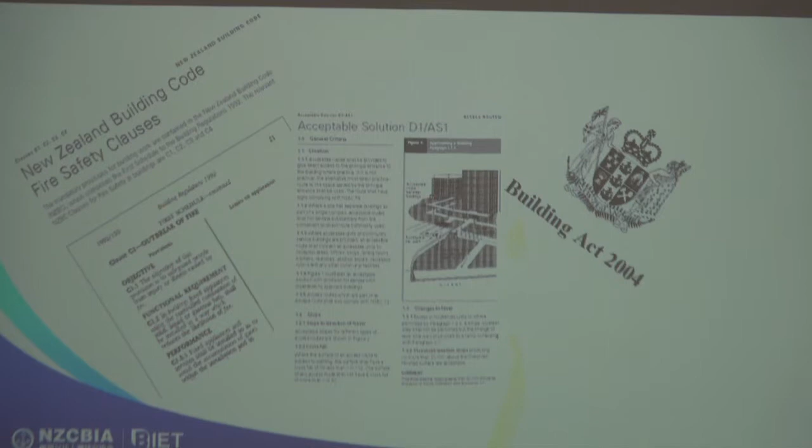So this is just an example of the Building Code, the fire safety clauses ones. There are three main requirements there: an objective, a functional requirement, and a performance criteria. That happens even if you're building a laundry in a residential house. There is an objective, a functional requirement, and a performance criteria.

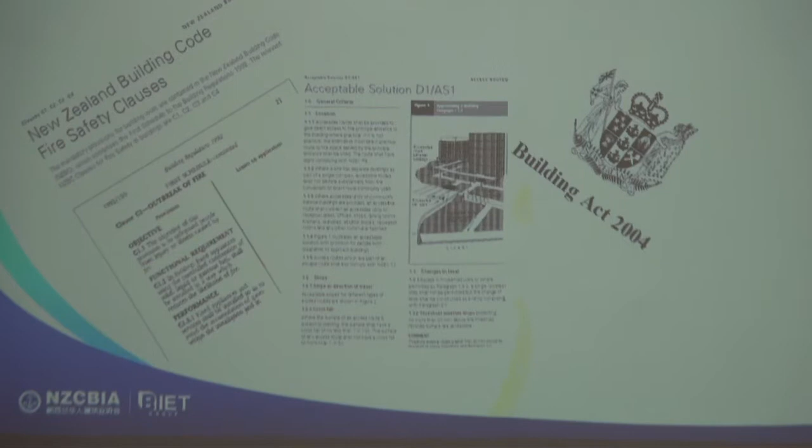The acceptable solutions tell you how to do it. The acceptable solutions are one way of complying. If you comply with the acceptable solutions, you therefore comply with the code, and you'll therefore get a code compliance certificate.

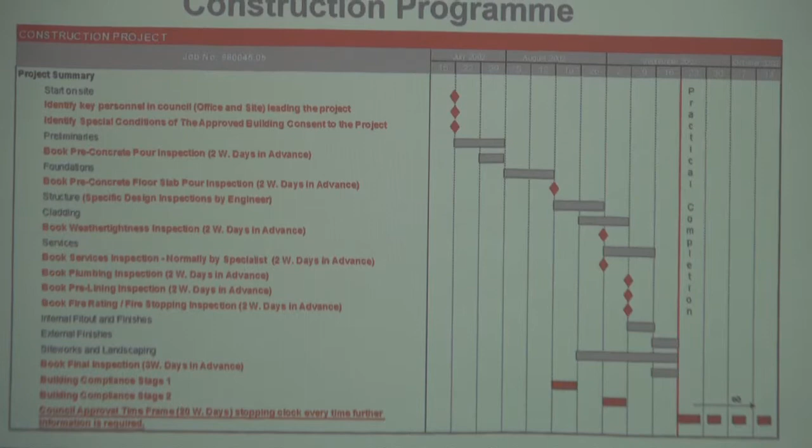So I'm really just talking all about the Building Act. What we do in construction is base everything on a construction program, and I'll do a little construction program a bit later, and some checklists of systems that we use and things that we do on site.

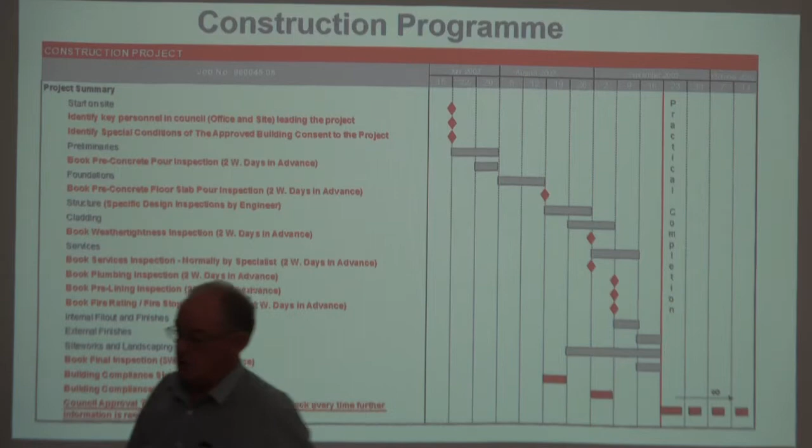I've written this up because the importance to me is the very last line. The very last line down here, and the time frame is when you get paid. So if you work through all of these items and you do every single item on there and you get your building inspector on site, be nice to the building inspector.

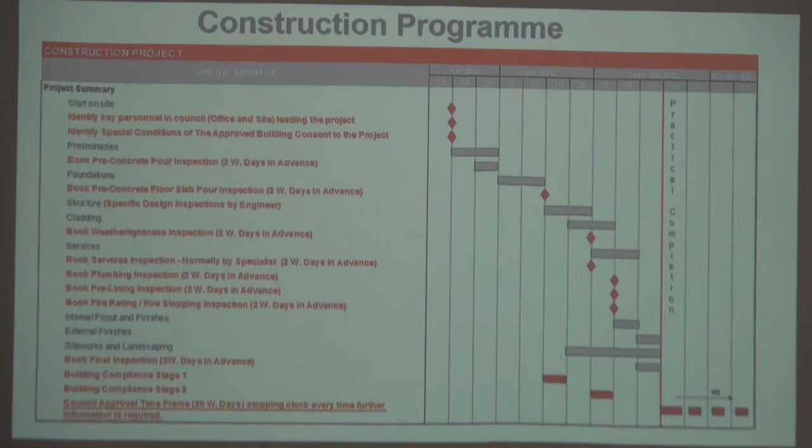I'm one, I used to be a building inspector. I like people being nice to me. Don't think he's the enemy. Don't think that he's someone that you can hoodwink, or a lot of people think don't tell the building inspector. That's actually not a good idea, because the building inspector, they've done a lot of training. They do continuous training all the time with new systems, new law that comes in, new products that come on the market. So therefore they've got good knowledge. Use that knowledge to your advantage.

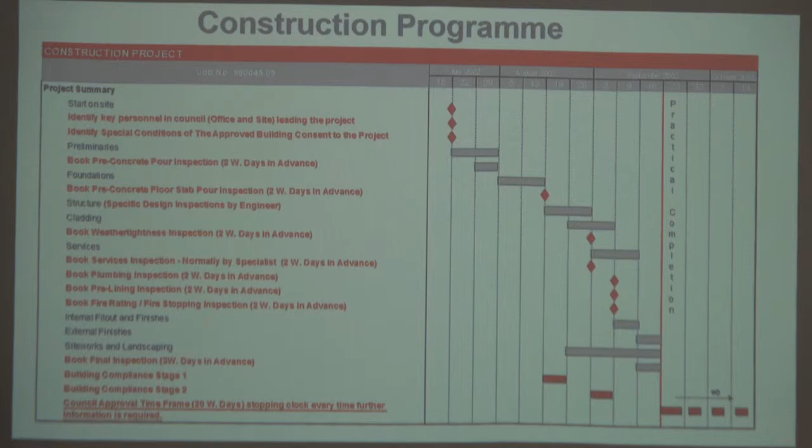Don't ignore it. So I'll be referring back to a construction program. What I want to do quickly though is just go back through some of the Building Act itself and what actually happens and the purposes. Well, go back one.

It talks about people. It talks about safety. It talks about health of the people. It talks about the well-being of the people. It talks about escaping during the event of a fire, and it talks about sustainable development.

Now, I've always called it the People Act because it protects the people. It doesn't protect the building. If the building burns down, get your insurance company to build it up again. We need to protect the people at all times, whether it's a simple house or a big commercial building. It does not matter - we're protecting the people.

The overview has lots of parts to it, and I've just picked out one item - matters relating to building practitioners and licensing, getting LBPs on board, which you use a lot during residential building with multiple story buildings. We don't use LBPs in big commercial buildings.

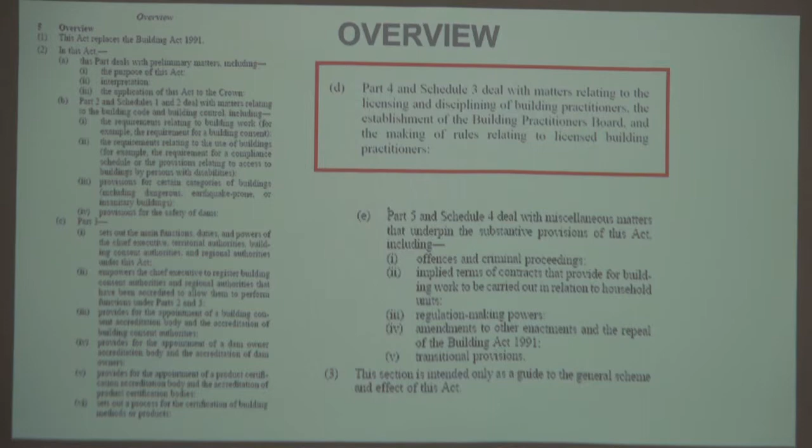But you do use an LBP a lot in specific wind zones where you've got high wind zones, cavity systems, very complicated roofs, and systems which are new to the market. So you use LBPs quite a bit for that.

The interpretation - there are pages of interpretation and codes. I'm going to pick on just three today: code compliance certificate, compliance document, and compliance schedule.

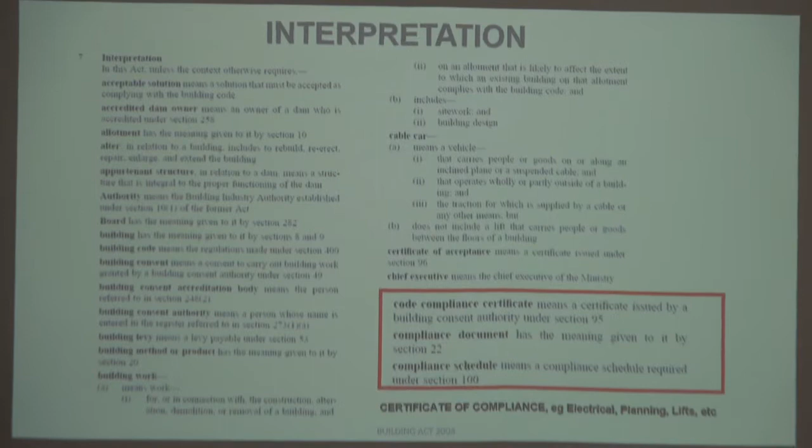Now I've said compliance, compliance, compliance. And the reason I've said that is, although I'm a quality and compliance person, to me compliance comes first. Because if you don't have compliance, you have not got quality. You can't have quality if you haven't got your code compliance certificate. So to me, compliance with the building code is the most important thing, and Jenny hears me talking about this a lot in the office and on site. Compliance with the building code is very, very important.

To achieve compliance, you've got plans and specifications behind them. See how it includes procedures for inspection. The council officer is required to inspect the building work, and you have to give that man or lady a chance to do that inspection.

You might be doing quite a large job, in which case you might have to use the inspector a number of times. We can write out some lists later - we'll pick up a job that you may be working on, something that you're doing, and I'll start writing up a list of things that we need to do to achieve compliance.

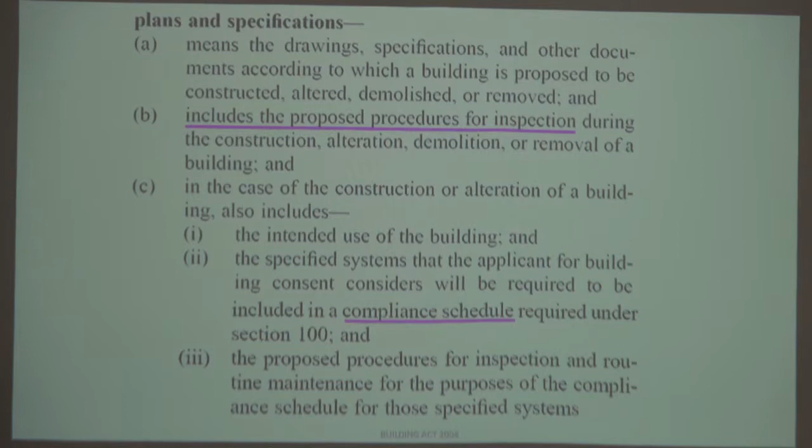Compliance schedules are used on big commercial buildings, and they're only used for systems in buildings that have fire alarms, lifts, mechanical ventilation, all of those kinds of systems - things that need to have a battery changed or need some kind of maintenance throughout the year. Then it goes on a compliance schedule and becomes part of the building warrant of fitness. I won't go into all of building warrant of fitnesses because I think that's commercial industrial work.

Further information is anything the council will want when you're applying for a building consent - it might be you've got a simple residential house and you're putting a beam in there, and that beam has a greater span than the New Zealand standards have. Then the council's going to ask for further information: how big is that beam going to be? What's it allowed to hold? Lightweight roof? Heavyweight roof? So all of this further information you need, and your architect needs to deal with it.

I've got a few there that particularly relate to large commercial buildings: fire engineering, heating and ventilating, lifts. The exterior cladding is quite important to you guys, but particularly if you're doing housing, because you're looking at cavity systems and specific design.

You're looking at a particular manufacturer who wants to put in a particular product on the job. That technical information you need to have in your hand so that you can show the building inspector. It's very important that you include the building inspector with all the relevant information, otherwise he's not going to pass it.

The best thing you can do is get on side with that building inspector, invite him onto the job early, do a walk around with them right from the early stages so that they get a handle on what's going to happen, why, when. You should have a program of time and date, because the owner is not going to pay you until you get your code compliance certificate. That's usually the case.

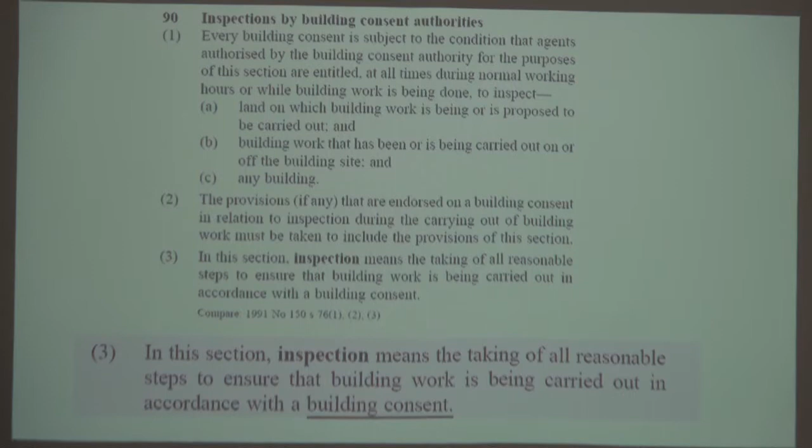And then we had a third one which built the actual big structural frame and the building work itself. And then the fourth one dealt with all of the internal fit out.

So we can do it in stage consents, and that's quite okay, quite acceptable. Not usually done with a residential building. With a residential building, you've usually got just one building consent, which makes it nice and easy.

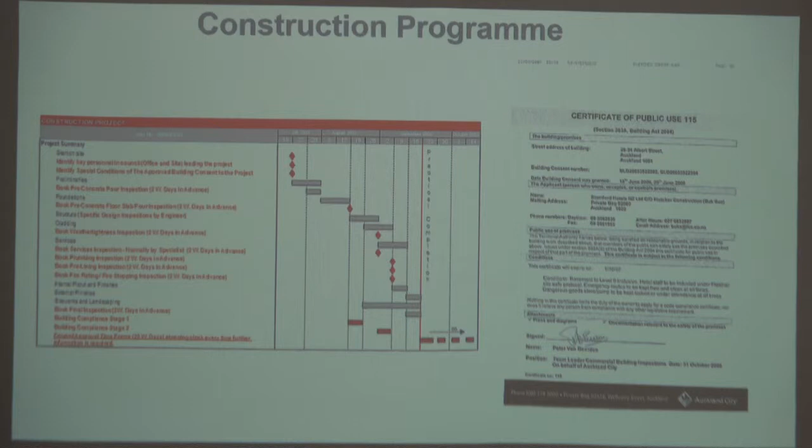Again, we go back to the program of identifying your personnel. That particular certificate is one we use on commercial and industrial buildings where you're allowed to occupy part of the building but not all of it, and continue the work. You can get a public use portion, like the shops on the ground floor, while you're building the rest. But your whole building consent relates to the whole building. You can't shut the building consent down with a code compliance certificate.

So understanding a building consent process, whether you've got a small residential building, and what I might do is just do a little quick thing on the whiteboard while this is up.

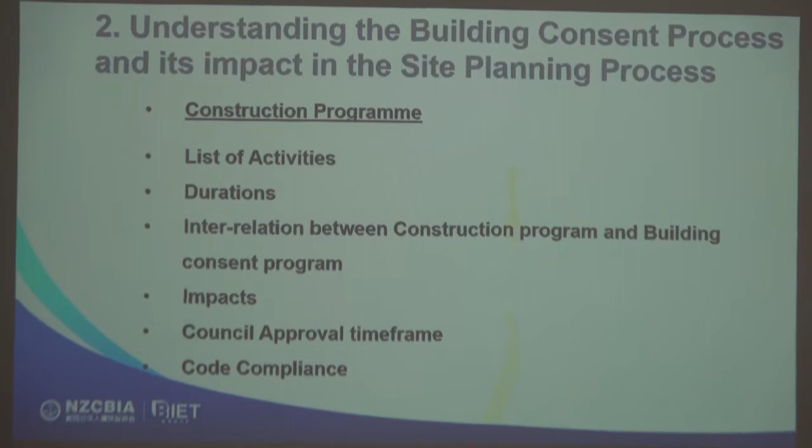What kind of work do you people work on normally? Are you working on small residential work? Is it additions, alterations, or is it a whole building, a whole brand new house?

The whole building. Okay, well let's have a look at the whole building work. I've got a construction program in there, but it deals with quite a large building. But let's just do, so it's a new dwelling.

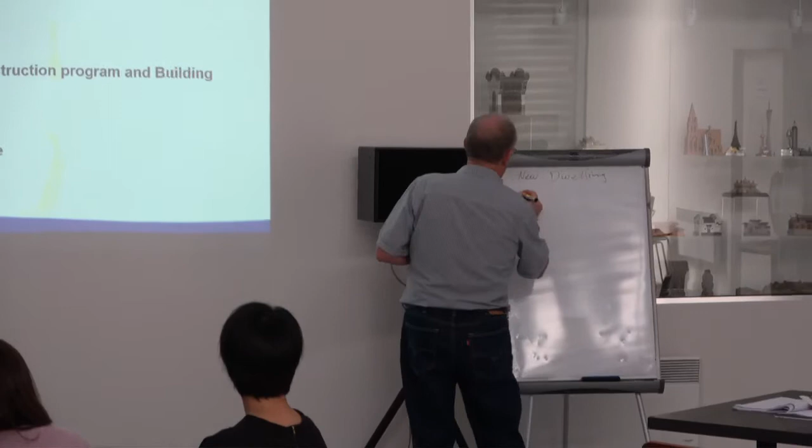So let's have a look at what's the first inspection you think you would go for when you're doing residential? Pre-pour, before you pour any concrete.

So one of the things you have to do is get the inspector involved before you cover things up. Covering it up with concrete, putting the gypboard lining on the walls, that's covering it up. Putting the roof on, that's covering up. Putting the outside cladding on, that's covering up. So there's a lot of inspections we might have to get.

For a very simple job, like an addition of a laundry or something, you might only have 5 inspections. But for an average dwelling, let's put it into a high wind zone. So the first one is foundations.

Different types of foundations, whether it's pile foundations or a concrete slab, you still need the inspector to have a look at the ground, because it depends which area you're working in. Some areas, like where I used to work up north in Albany, had poor ground and you needed to get that inspected first.

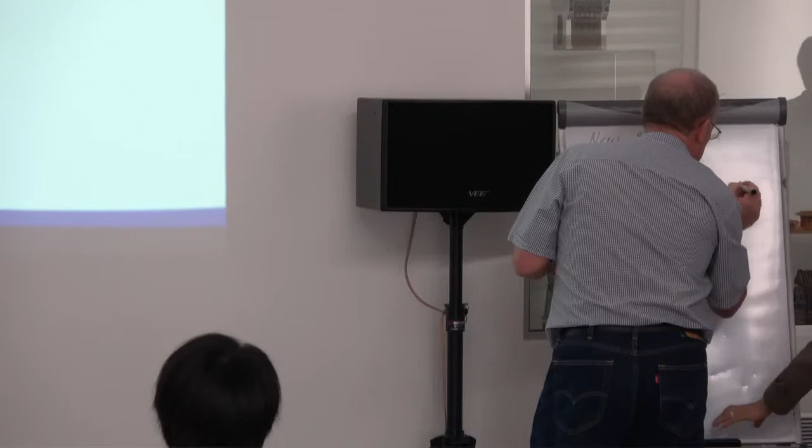If there's 2 different types, there's pile foundations. But in each case, whether pile foundations or a slab foundation, you need to get the inspector involved because they need to look at the ground to make sure. I had various jobs where, as an inspector, I was asked to go look at a job in Northcote.

I went on site to have a look at the job, and they had some foundations poured, some foundations dug, and a lot of work happening with machinery. Thank you, I might use that one.

But whilst I was doing my inspections, I was walking along and happened to notice a hole in the ground with a man's shirt in there. And I thought, well, that's odd, I shouldn't see a man's shirt in the hole in the ground.

So I did all of the inspection, very steep ground. I said, we must have an engineer involved here. And by the way, you've left your shirt in there. So I went down to pick his shirt up. Underneath was the drain. He was trying to hide the drain from me, even though it was on the plans, and tried to hide it by throwing a shirt in there.

That made me look for more and more on the site. If he had been honest and upfront with me and said, hey, look, I've got a drain here, what do you think I should do, I would have been able to say why don't you do this and why don't you do that, and we can fix that problem. But instead he tried to hide it, which only made me go looking for what else he'd hidden. So try and get the building inspector on site.

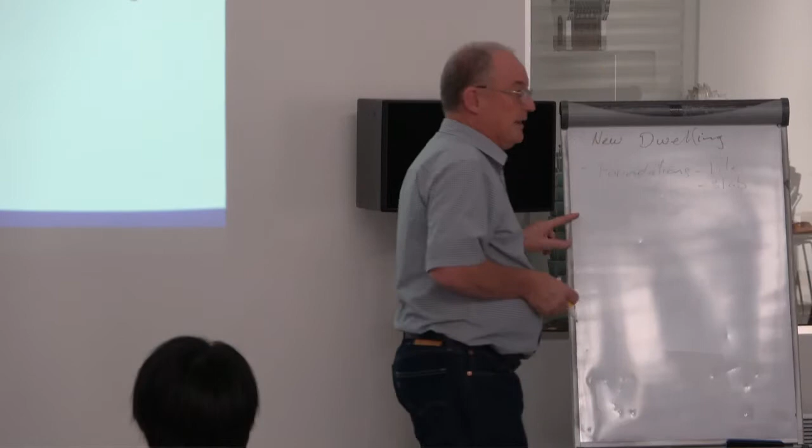Foundations. If you've got a slab system, you need the plumbing inspector.

So you need the plumbing and drainage inspected by the plumbing and drainage inspector before it's covered up, before you put your membrane down. Because you've got plumbing pipes in there that need to be on the correct fall, and they need to be the right type, whether it's copper or plastic, doesn't matter. So that's another one.

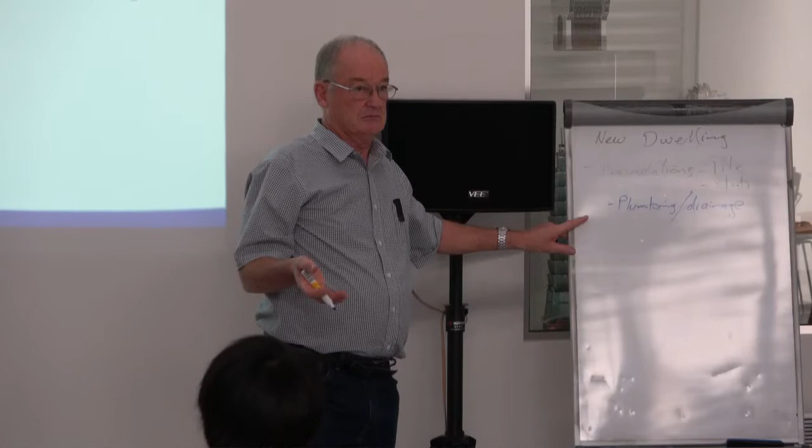Can anyone think of anything else in there? We don't look at services like electrical services. They're nice to have. We don't look at systems like underfloor heating. If it's in there, that's fine and we'll accept that, but we don't test them because they're not a critical part of the building code.

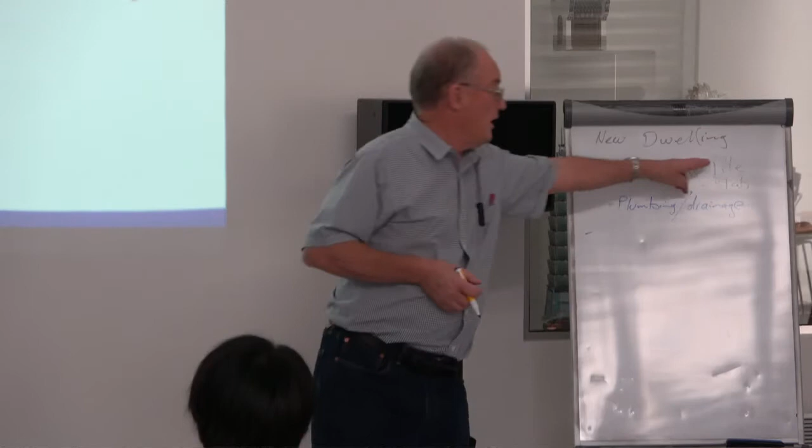Not yet, anyway. So then we've got another system in plumbing drainage, so that's just in the ground. Now we can book our concrete, once we get a pass. Whether it's pile foundations or a slab, doesn't matter, we can now pour the concrete.

Don't have the concrete truck sitting out on the road expecting the inspector to turn up, because he won't. I know, I've done that. There's no point in doing that. So make sure you book - you need 2 days in advance to ring ahead, to get hold of the City Council to get your inspector booked.

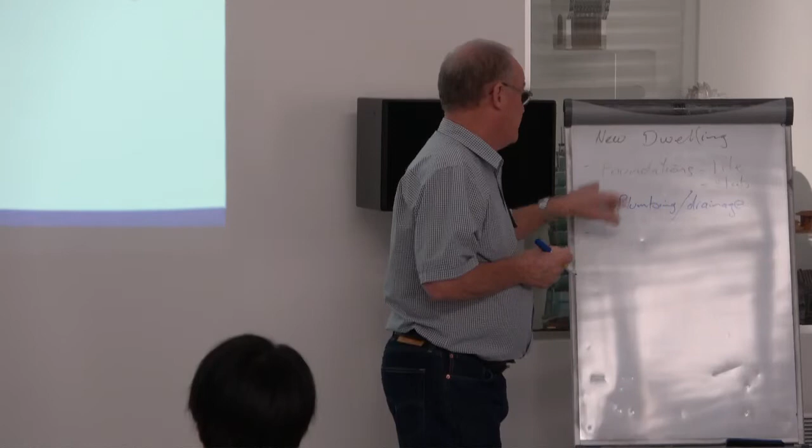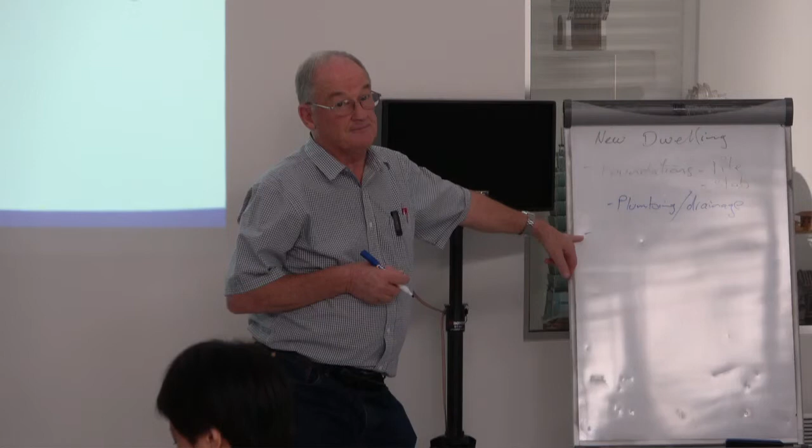Then, so plumbing and foundations, then we've got to look at systems with - the next one after that would be framing inspection. A framing inspection will be pretty well when you've got the roof on, covering the framing, but of course the inspector wants to look at the framing under the floor if it's a typical pile foundation, joists and whatever. They'll want to have a look under there as well, and to make sure you've got all the correct nogs supporting the joints of the flooring right through to the insulation, all of those systems in place.

But that's all can be seen and it's not covered up, right? So that's a framing inspection, and a lot of inspectors won't do the framing inspection until you've got the outside cladding in. The outside cladding is to protect the framing, particularly if it's kiln-dried timber. If it's kiln-dried timber, you don't want that getting wet again. So you've got a framing inspection really when you've got the outside wrap on, the first layer.

Don't put all of the layers on, just the building paper on. Get it covered in, and at least talk to your building inspector to find out what he wants to do next. He'll want to see the flashings for the windows. There's all of this detail that needs to come, so you've got a framing inspection, window detail, moisture content.

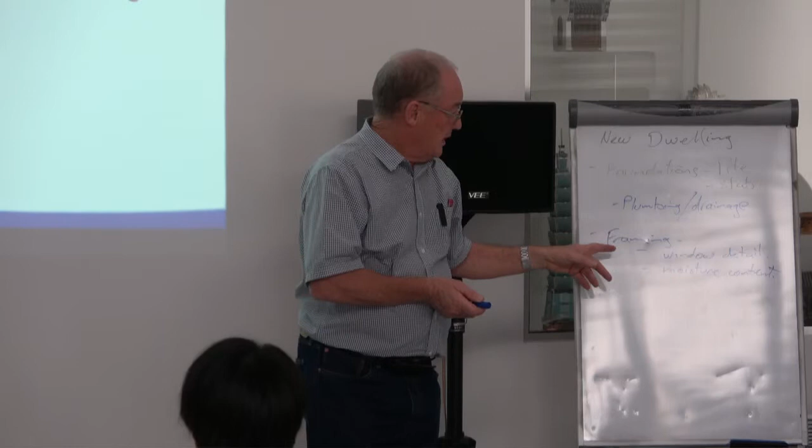Pre-line framing. Then with framing you've got a pre-lined framing and a post-line, so you've got two different inspections. So at this point you'll need your plumber involved.

Plumbing and plumbing services - there's lots of things to look at, making sure your plumber doesn't just drill a big hole through the stud to put his pipe through, and therefore you lose the integrity of the stud. I've seen that so many times as a building inspector. I've seen pipes put through the underfloor joists with a very large hole right in the middle, and the joist will collapse.

Very recently I had friends who've got a house over in Hobsonville, and we've been doing some renovations to it. We took it apart. We always wondered why the floor was a bit bouncy. We took the floor up, and someone had taken a chainsaw and cut big notches out of the joists to get a new pipe through, so the floor joists were only that thick instead of being that thick. So yeah, a bit of a cowboy, wasn't a very good idea.

You've got to be a wee bit careful with that sort of thing. Plumbing services - make sure that each person is involved. I can go in depth on all of this and spend a lot of time on different examples, but I'm just going to do a brief overview. Plumbing services and framing happen before you do your linings. So again, these are critical stages - you've got a building inspector who needs to be out, and a plumbing inspector who needs to be at the beginning, a framing inspection, and then another framing inspection which is the post-lining inspection.

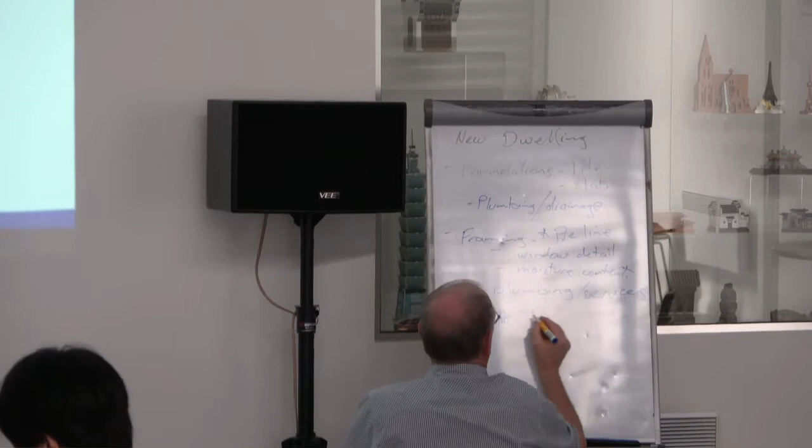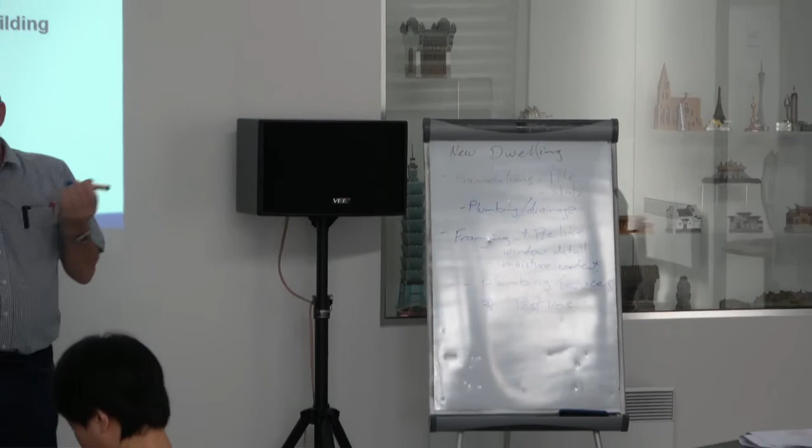So that's framing pre-line, and then post-line inspections. Post-line inspections are there for doing bracing systems. I've got a bracing book here somewhere.

So you'll see quite often typical bracing systems. Winstone's put out a book on GIB bracing, and one of the most important things I come to look at is the structural framing and whether it's compliant with the type of treatment, whether it's got the right moisture content, and whether you've got no major cutouts, holes, or big knots in the timber, particularly in a brace.

In a typical standard house, the bracing - which is the structural framing - is supporting the rest of the house. If you don't get that correct for the framing, and if you don't get the correct fixings holding the brace down, in an earthquake or a high wind zone, that brace is going to fall over. So with the bracing, particularly with GIB board, you've got fixings all around the sheet, and those fixings are absolutely critical to getting compliance.

So your post-line inspection is quite important, because as the building inspector, I'm going to want to see all the fixings in the GIB board, and the first thing I'm going to look at is the plans. I'm going to go round with the plans with you, and I'm going to be saying, right, there's got to be a brace on this wall, and that wall there's got to have this type of brace. Where's the fixing straps holding the top plate and bottom plate down onto the joists? So that's another very important one.

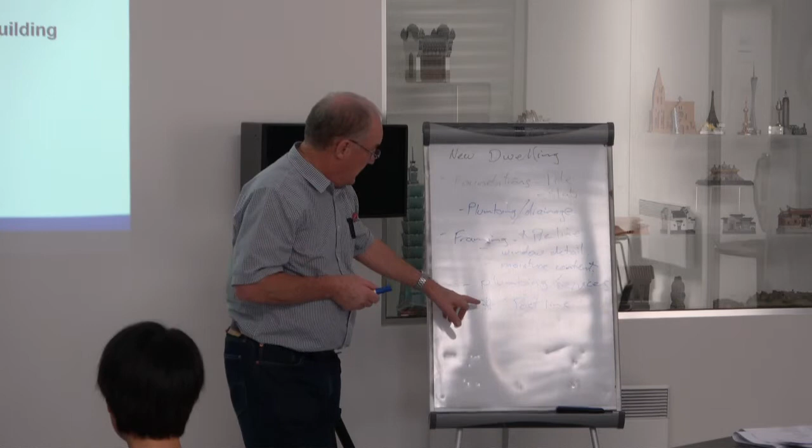Post-line inspection would look at, on a house, the fixings of the GIB board. You'd make sure all those systems are in place exactly as on the plans, as it's meant to be.

Sometimes you can do a change where the owner will come along and say, oh, I don't want that there, I want to move the door further along, and you can change the brace slightly. That's a minor variation, the building inspector can sign that off.

If the owner comes along and says, I want a great big opening in there, I want free flow between these two rooms, and it used to be a brace wall, that's a major change. You've now got to go back to your designer to get the design of your braces in other parts of the building, because your bracing is for the whole envelope of the building, not just one wall. There's no point having one wall of the house very rigid and all the rest going to get blown to bits. So the bracing calculations for the whole house are important.

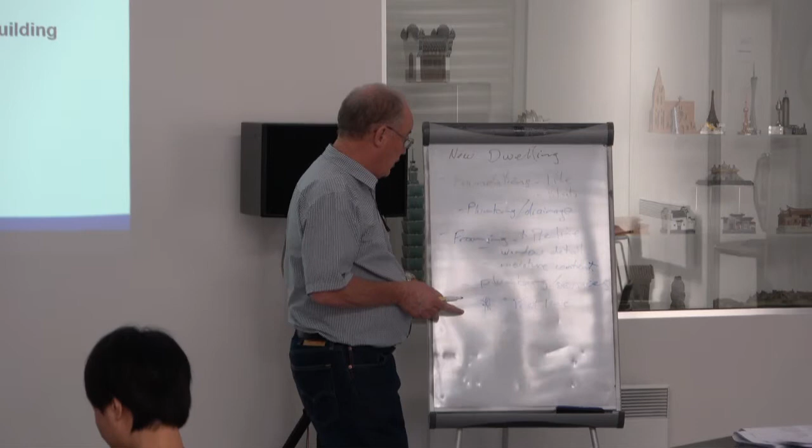Post-line. For a new dwelling, we need at least 5 inspections minimum: foundations, plumbing and drainage, framing, pre-line and post-line, and then we get down to final inspections.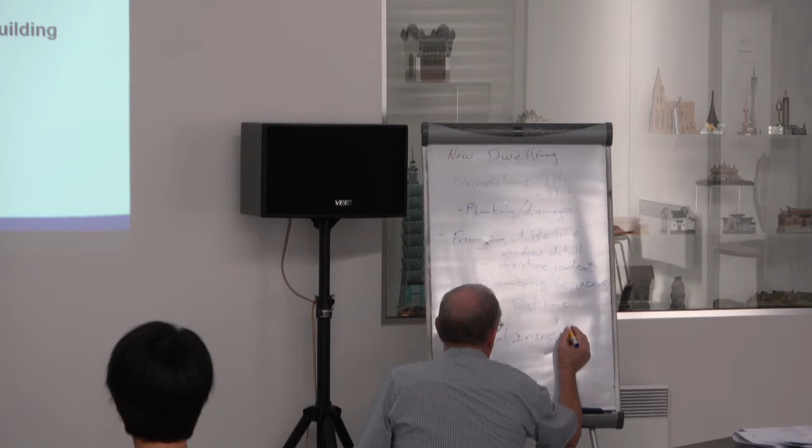So there's usually about 5 main inspections for getting the building inspector on site, that's if you've got everything exactly accurate to those plans. So that's a pretty basic, simple house, 5 inspections.

If you've got something that needs an LBP, a licensed building practitioner overviewing and supervising the work, get the LBP on board, get them there at the same time as the building inspector. Let them do the talking, let them figure out what's acceptable and what isn't. The LBP might take responsibility for something the building inspector won't take responsibility for.

Where to get to on this? So go back to the construction program, I had a construction program in here, and I've got the key personnel, identifying the special conditions.

One very important thing, the second one down on this line, identifying the special conditions of the approved building consent. Always make sure when you've got a building inspector on site, you've got the building consent plans to show him. It's absolutely important.

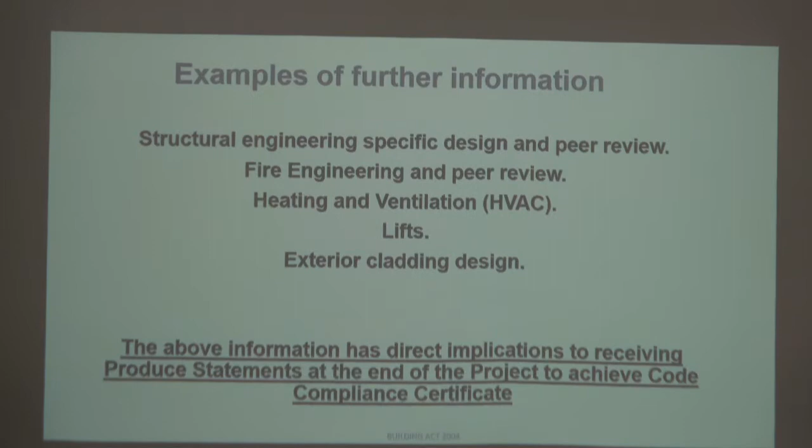Make sure your special conditions - now in your building consent you will have special conditions. I had that up on there a bit earlier, I don't know whether I can find that. It was one of the early ones, wasn't it? I had mostly fire engineering and things up there.

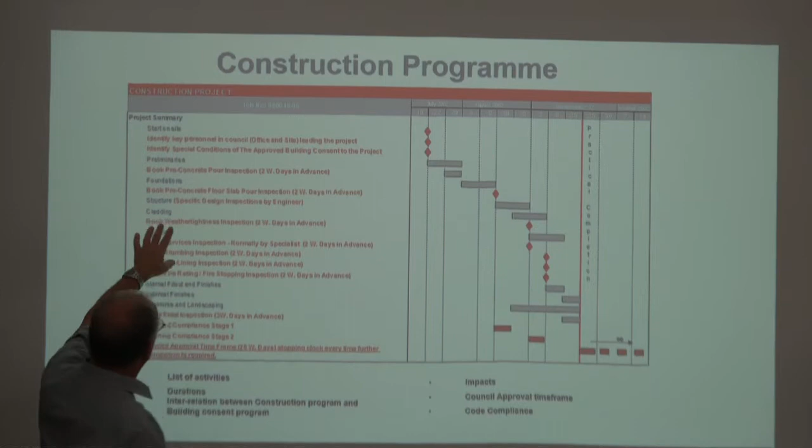This'll do. So I've got in here pre-pour, the concrete pour inspections. Make sure you're booking them 2 days in advance. At the end, when you've got concrete booked, why don't you book the building inspector at the same time? If you're booking concrete for next Tuesday, book the building inspector for Monday afternoon. Give yourself a little bit of time in case there's any corrections to be done, or you've got to cancel your concrete pour.

Don't book it for the same day, it's not a good idea. Your building inspector might be late turning up, and your concrete's sitting on the road. If the concrete truck's sitting on the road for more than 45 minutes, I'll order it off the site. It's no good, the concrete's useless.

The concrete's actually gone off in the truck. Once it's gone past that initial set, the concrete won't be any good and it won't be good high-strength concrete. So don't have a truck sitting on the road for an hour and a half.

If I turned up on site to do an inspection and there's one concrete truck sitting there waiting to pour, and I'm just starting the inspection and the second truck is sitting out on the road, I'll be saying to that person in charge, get rid of that truck. It's no good, it's been there too long.

45 minutes maximum, and that's from the time it leaves the plant yard till the time it gets to your site.

Jenny and I were working at the new prison in Paremoremo.

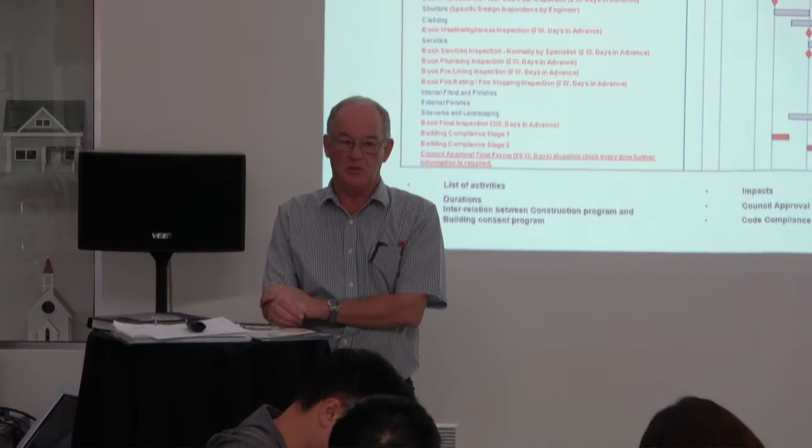And we had a very, very difficult building inspector who was very, very by the book. Everything had to be by the book.

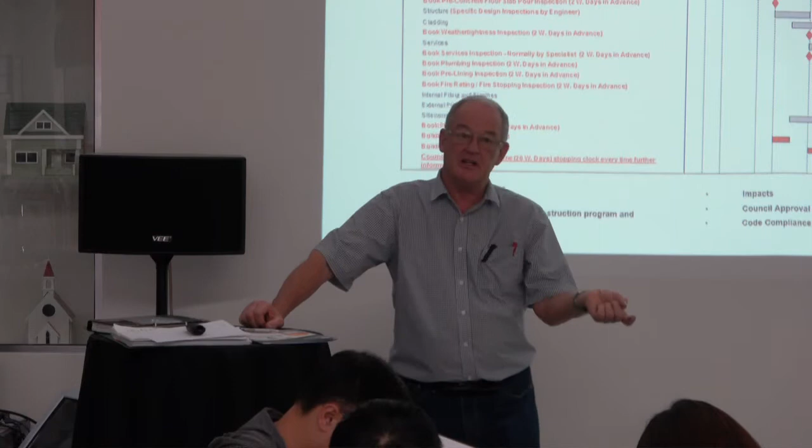That particular job was designed for a 100-year lifespan, and because it was a higher grade than normal buildings, because at the end of the day it was almost bomb-proof, and because even in an emergency we don't want the worst criminals escaping.

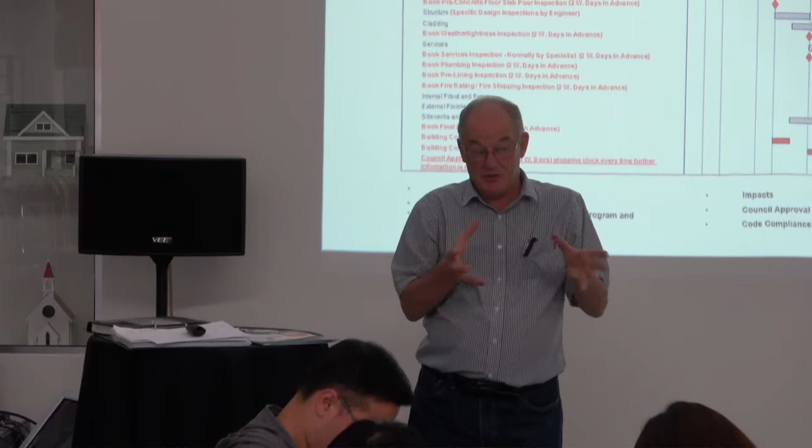So that building is very, very strictly controlled with double layers of reinforcing, high density block work, and we had to be very, very careful that the concrete trucks coming in had the right grade of concrete.

Sometimes we had 4 and 5 trucks coming on site. We had to make sure their documentation, the driver had to hand me the documentation to say, I've got this type of concrete on. Well, you're in the wrong place, mate, you should be over there, not here.

You've got to be very careful that we didn't put the wrong strength concrete into an area that required very high strength concrete. It took a lot of work and a lot of identification.

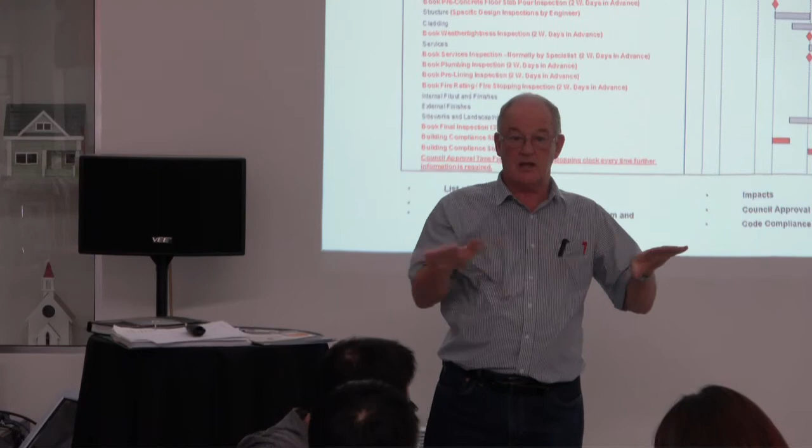That's why your systems, your paperwork, your documentation has to be so accurate, so that people can track back when things were done, right down to where did you get the timber framing from.

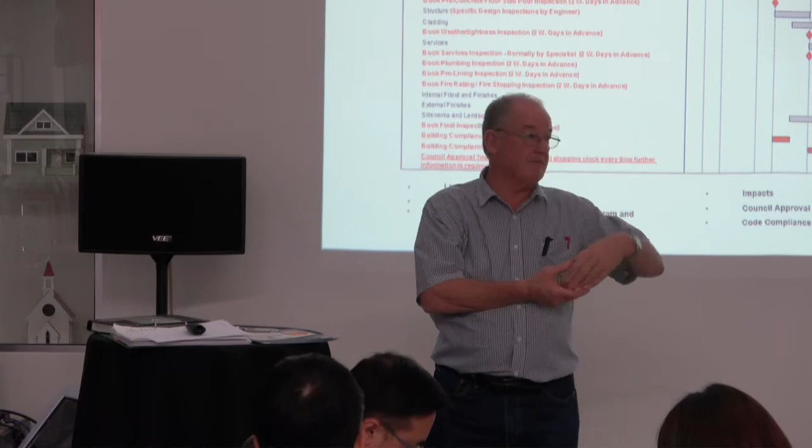So if the timber framing came from a yard somewhere way down country and it was extremely wet when it arrived, then it's not going to dry in a hurry.

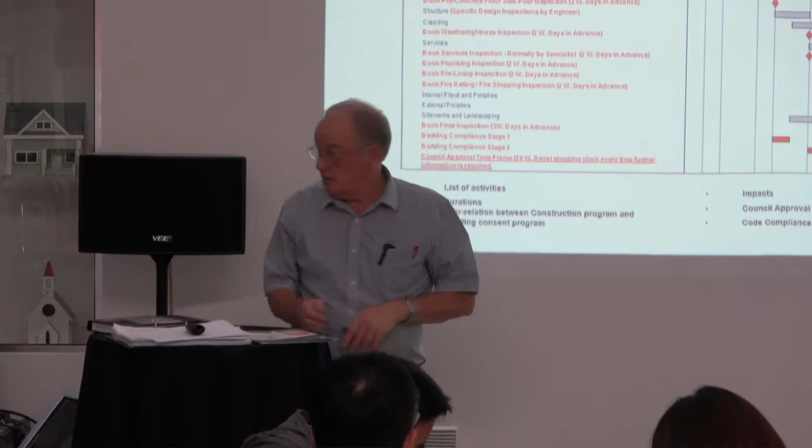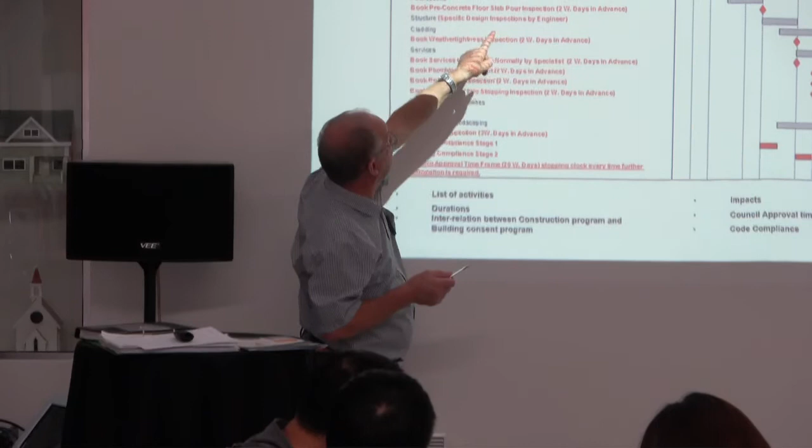Okay, just very quickly, I'll work down to here. So even in a small job, you've got pre-booking the concrete slab, you've got weather tightness inspections.

I'll deal with weather tightness inspections a bit later. But you've normally got lots of pre-booking inspections. On my one, I had fire stopping.

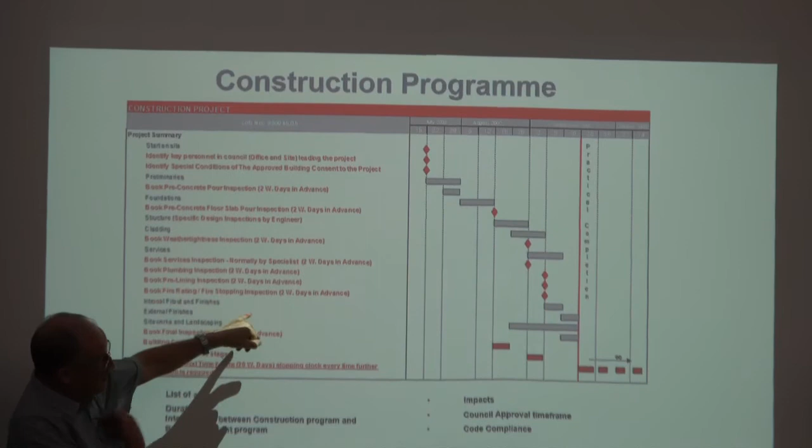But always, the council have 20 working days to produce the building consent if they've got all the right information. If they're asking for information, they put the stop clock on.

You need to give the council, if you can give the council 2 days notice before they come out to a concrete pour, that's better. Don't try and ring them on the same day, it won't happen.

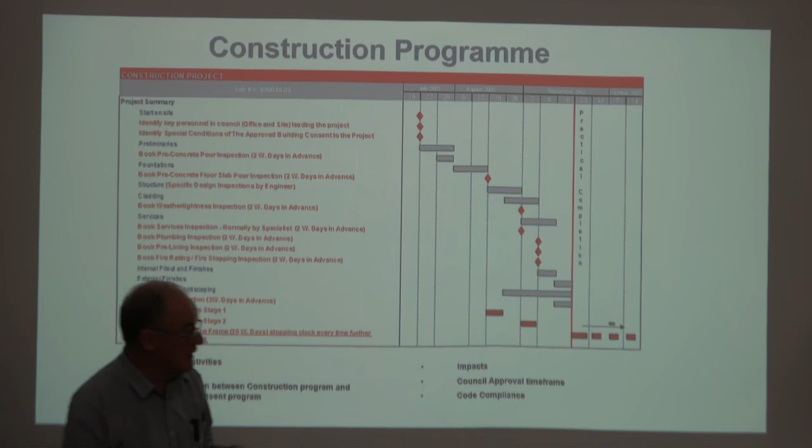All right, so there's a key to getting all of these inspected, and this is very, very simple. Small dwelling, 5 inspections, and that's pretty minimal.